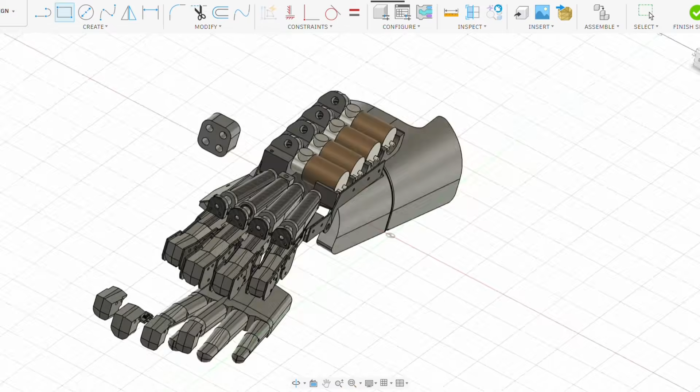And to explain the design that I've come up with that is on my left hand, we're going to jump straight into CAD. And here it is, probably the most complicated single design that I've ever made, just because of the quantity of different parts that are involved. So we're going to start off with the easy end, that being the forearm, which is going to be rotating for some better wrist movement.

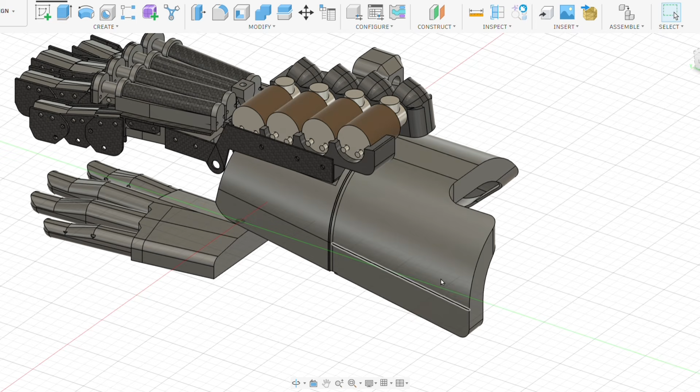This consists of two main casings, the geometry of which is based on what's on the power armour suit already, so I know they'll fit. This casing can be filled with armour and then used to mount onto the carbon fibre exoskeleton. And if we just remove the back plate here, you can see where this will basically slot into the other half of the forearm, which will be held together with a T-slot of carbon fibre for strength, allowing it to rotate around.

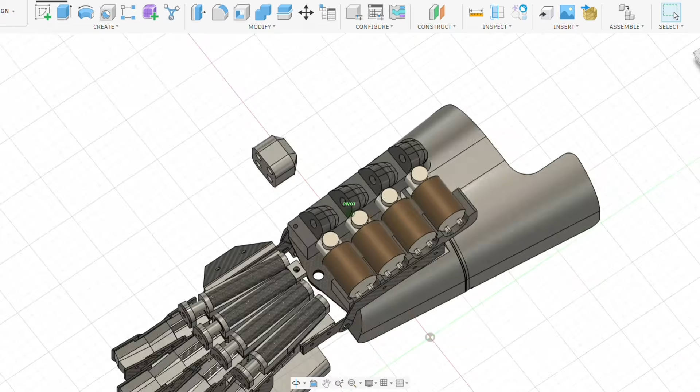And then moving further forward, this whole thing is going to be pneumatic like the rest of the suit is going to start off being, at least. So we've got this air solenoid valve block mounted on the front of the forearm. This consists of 4 simple air solenoids that are screwed into a 3D print that's going to be a high infill. It won't be quite airtight, but it'll be airtight enough for this procedure.

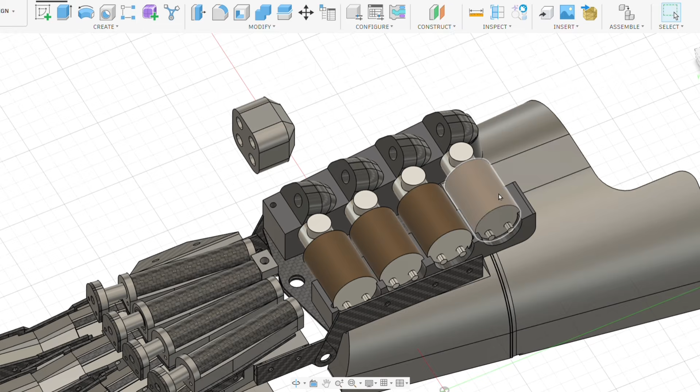There'll then be push-fit connectors mounted into that block for air pipes to go to the hand, as well as push-fit connectors mounted into the solenoid to go into a central block for the air supply. That then brings us further on to the pistons and cylinders that are mounted on top of the palm. These are carbon fibre cylinders mounted onto 3D prints that are used just to hold the cylinders in place.

Then the pistons in question will have an O-ring on one end. They'll be predominantly 3D printed down the middle, but we'll have a bolt that runs down the centre for strength, and then a carbon fibre end plate, which then allows cables to be attached onto the end.

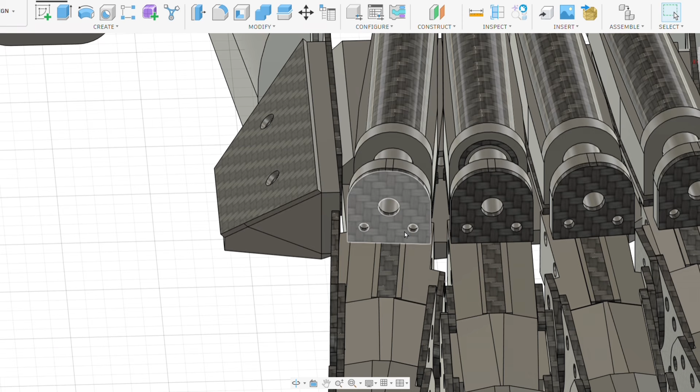I'm using this mix of 3D printed parts and carbon fibre to make sure I've got the strength where I need it from the easy to machine cured pieces of carbon fibre, while having the cheapness and flexibility of using 3D printed parts in the middle of everything, where the geometry is complex and hard to make out of carbon fibre, but also doesn't need strength in those places.

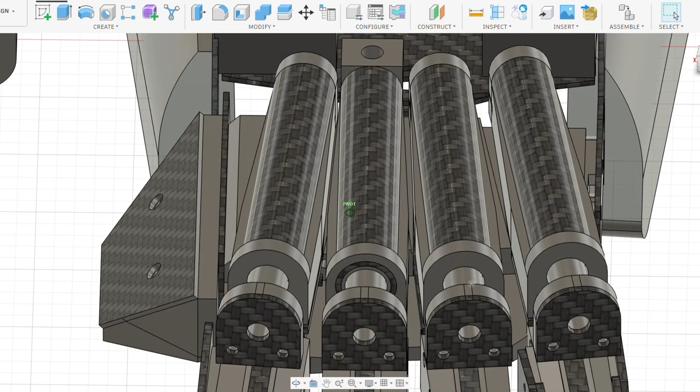Which brings me on to where those cables are running. These cables then run from that carbon fibre plate on the tip of the piston down through the holders of the cylinders, and then around the back of the palm, and then through the holes through the centre of the palm, which hopefully you can just about see here. The cables then come out of these holes and then run down the side of the fingers.

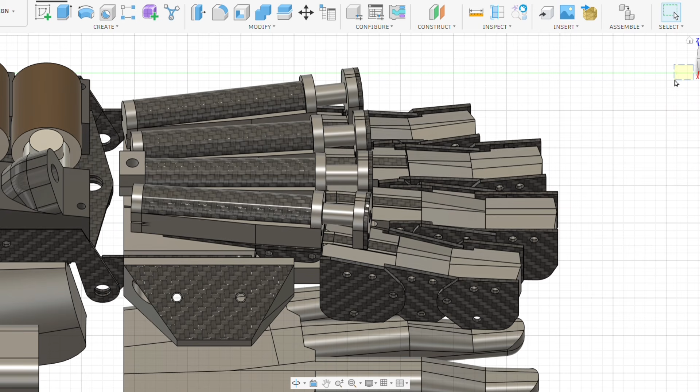They then run through the holes on the carbon fibre on the side of the fingers and then attach to the bolt hole at the tip of the fingers. This means when air pressure is then applied down the cylinder, it then pushes the piston out, pulls the cable down through the hole, and then coils and closes the finger up. And that is how it applies pressure. That is how it assists on that grip strength.

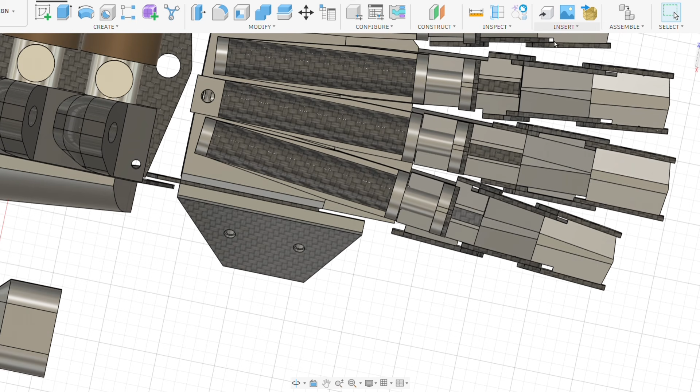And while we are rotated onto this side of the hand, you can see there isn't actually a thumb on this. The reason for that is just that the thumb is really complex in movement, and because I don't know how well this is going to work or how aggressive it's going to be, as well with the fact that I'm tight for space already, I'm going to leave it off for now. I've just got this nice carbon fibre looking cover over the side of it, but I figure as well, really your thumb just kind of locks everything in place. It doesn't provide that much power. So once I've figured this thing out, I can add it on at a later date.

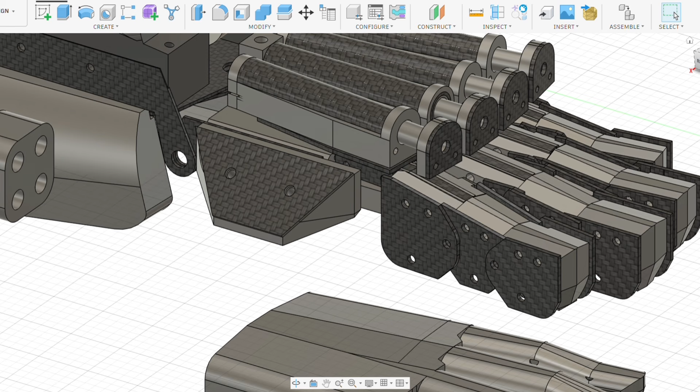And lastly on this overcomplicated CAD design is the most complicated thing, which is the fingers. So the trouble with the fingers, as I've mentioned, is that they need to be really thin. So we've got these thin pieces of carbon fibre running down either side of the 3D print. The carbon fibre pieces will then bolt together at the knuckles to make up the structure of the fingers. However, it does get more complicated than that, because you then have the knuckle around the top of the fist, like your punching knuckle. The problem is you can't have the hinging point in the middle of that knuckle, because that would obviously interfere with the middle of your hand.

So instead, I've had to incorporate a sliding mechanism that rotates over the palm, over the top of the fingers, which if we remove this cylinder holder, you can just about see where the mechanism is. We've got these carbon fibre plates. There's one on top here that you can see, and then there's one going through the central point of the palm with 5mm carbon fibre pieces on each end, which then attach to the hinging mechanism at the front, which you can just about see here, which then attaches to the finger, allowing it all to extend over your hand as you close your fingers round.

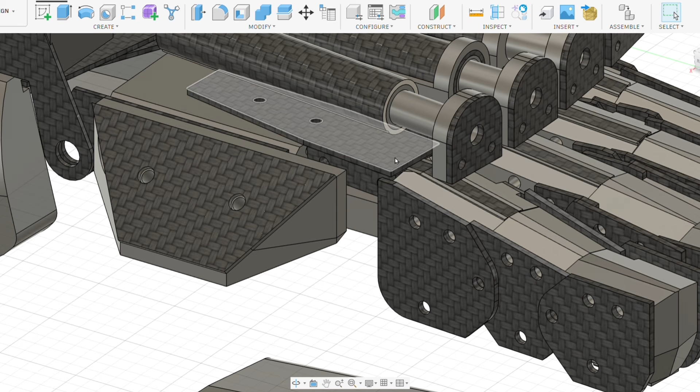I've made this so when it's extended, it all kind of locks against each other. So as the piston pushes the cable out and the cable pulls the fingers round, it won't be able to crush your fingers back into place. The whole thing will basically lock out against itself, allowing it to close the fingers tighter without dragging the fingers back in the slide. I hope that makes sense. I'll try to demonstrate this as best as possible when it's all built up.

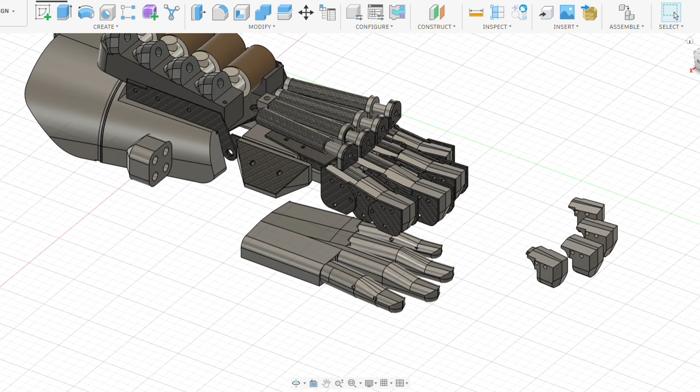And then to make sure I wasn't just completely guessing with finger geometry and everything like that, I did do a very, very simple 3D model of my left hand. I wanted it smooth, didn't want it super detailed, that way I could just push it up inside the 3D prints to create a mould in CAD to make sure that my hand fits it correctly and all of the hinge points are right.

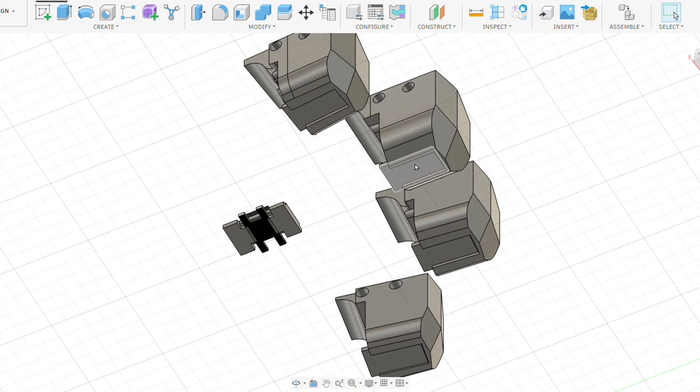This finally brings me on to how I'm actually going to activate the air solenoids that then push the pistons out. For this, I'm just going to have easy, simple electrical buttons in the fingertips. This thing is only going to close, it's not going to open the fingers, that way there's less chance of me breaking my fingers. And the reason why I want these buttons in the fingertips is so they only activate when I'm actively gripping something. So only when I'm pressing down on something do my fingers inside the fingertips then press the switches down. These are just going to be on and off switches, which doesn't bother me because I can also alter the pressure going into the cylinders.

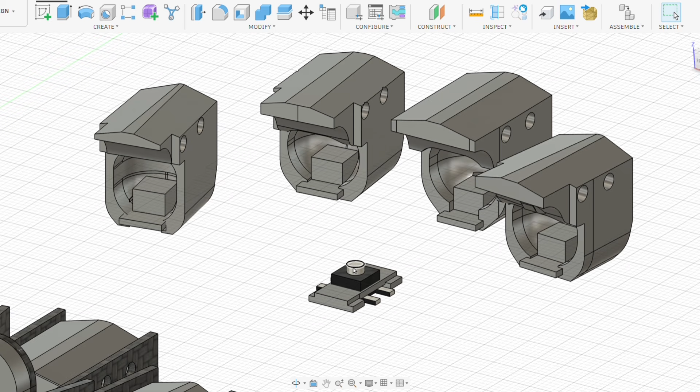This is a Mark 1, so I'm not bothered about variance. And because they'll only activate when I'm clamping down on something, it's not like it matters if it's high or low pressure going into it. These are going to be simple Arduino toggle button switches. You can buy them on these little boards that I will then badly solder to wires and then slot them

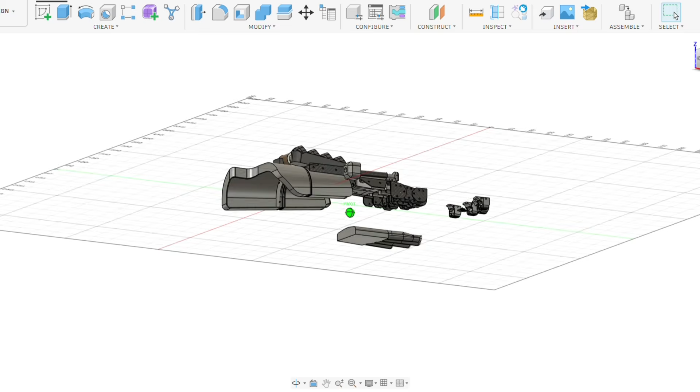into the fingertips. The wiring is then going to be a complete mess because I don't know where to run it. I don't know how much slack I need on the wires, so that's just going to kind of sit underneath the palm. But they'll do for the Mark 1. These wires can then run to the air solenoids, etc. Oh, and I've just realised I missed the wrist mechanism.

So you've got the plates of carbon fibre that go on the side of the solenoid block, carbon fibre pieces that then bolt along the side of the palm. These are then hinged up and down for the up and down movement. You then have two plates of carbon fibre with that hinging point in the middle that allows your hand to rotate a bit left and right.

I did decide to have the air solenoid block attached directly to the hand on that one. That's just to kind of limit movement that's going to have to exist between the air pipes and everything. I thought it would be less likely to break if as much is attached to the hand as possible. That whole system I'm hoping is going to work really well because that is a part that regardless I would like to move on to the rest of the power armour whether I've got a gauntlet or not.

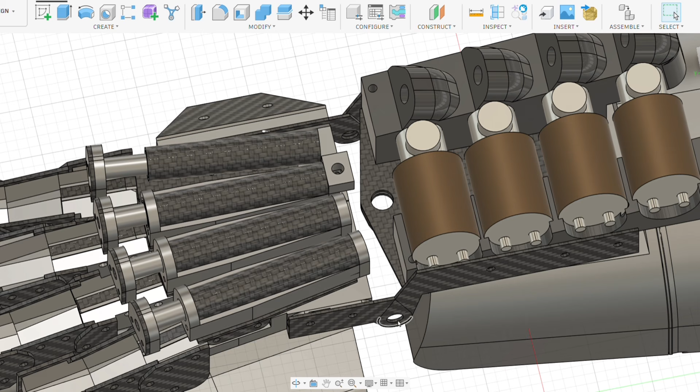And I think, ladies and gentlemen, I'm sure mainly gentlemen, we have finally done this CAD design and it's time to move on to the actual build. If you're still with us, thank you very much. Please keep on watching to make up for the ones that couldn't make it past my rambling of this design. Anyway, to the CNC machine.

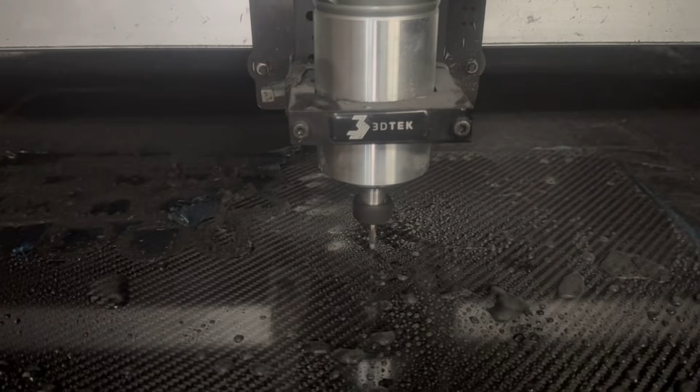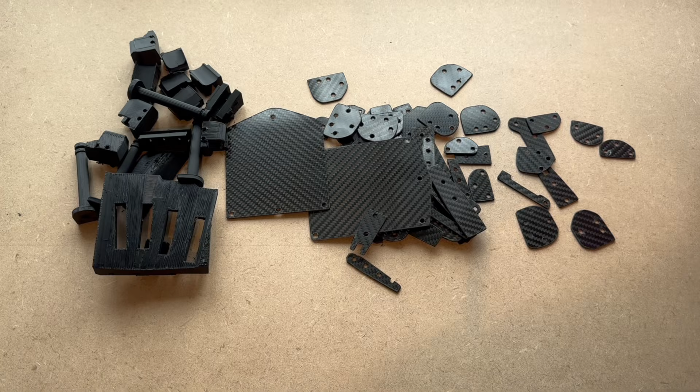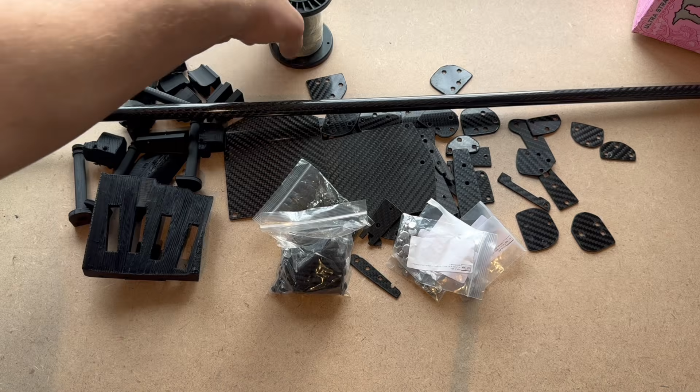And here we have all the 3D printed parts, and then we have the CNC cut carbon fibre parts, as well as some carbon fibre tubes for the cylinders, a load of bolts, M4 in particular, as well as some sleeve nuts, also some of these threaded rivets, and some 1mm steel cable, along with the two main pieces of the forearm, the 3D print casings for the armour.

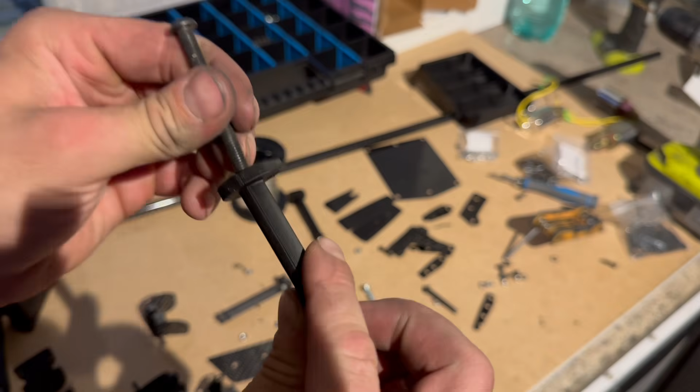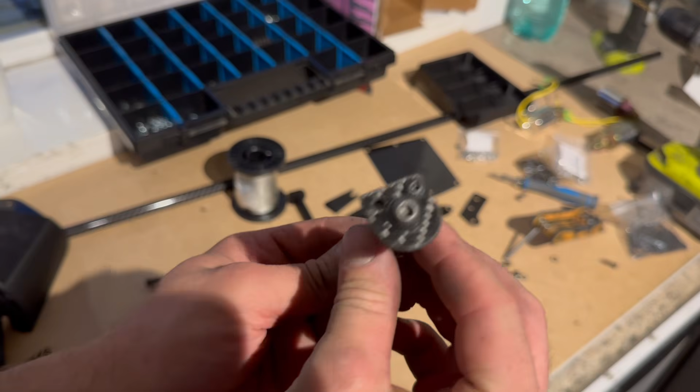I thought I would start with the pistons. You can see how long the bolt is and how it runs through the centre of that 3D print and how the 3D print is not actually the structure of it. It just helps to hold the O-ring and add to a mounting point for that carbon fibre that is again held in place with the bolt. It's almost like using rebar in concrete in a way.

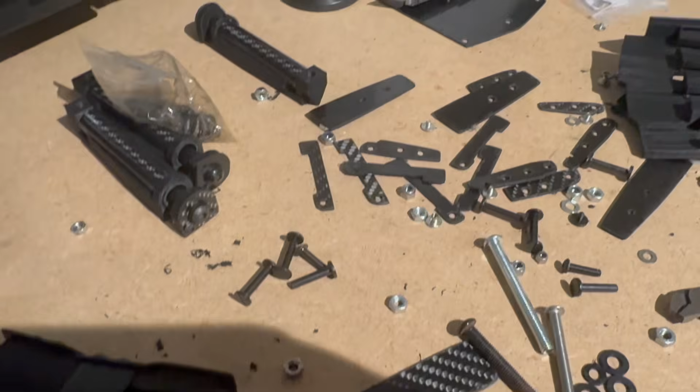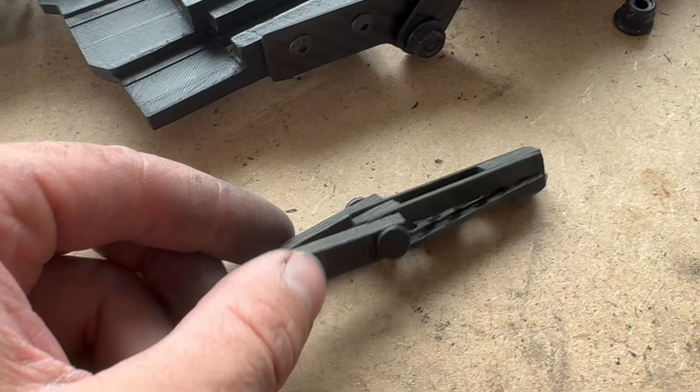Then there's something I couldn't quite show in CAD, and it's these nut inserts in the bottom of the cylinder holders. These allow each of the fingers to be bolted together through that carbon fibre and easily secured into the palm, crucially without interacting with the cylinder itself. And then this is part of that carbon fibre mechanism that rotates over the top of the palm. You can see how it kind of fits in there. You can see how it slots into the palm there.

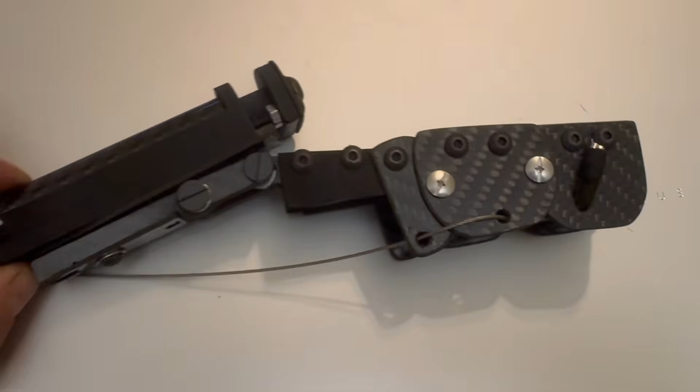But here you can see the finger built up with the piston attached. You can kind of get more of a drift of how it all slots in and fits together. Then we have the valve block all built up with the push fits and solenoids all screwed in neatly. But then I have to admit the build quality took quite a dive when I had to solder these little buttons on to the wires. But they are the right size and they do slot into the fingertips nicely.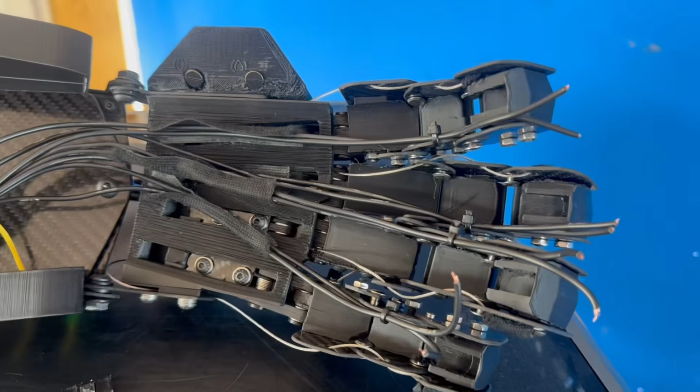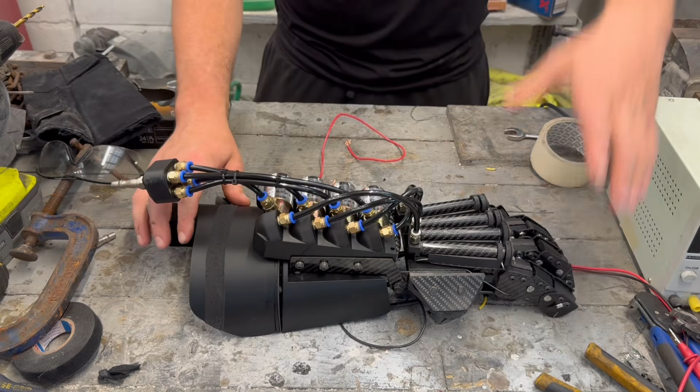Of which here you can see how badly the wiring's going, but you can see how I couldn't really work out where to route it and how much slack I needed, and that this was just the easiest way at this point. So I've now got the hand all built up with what should be the final valve block and final fittings for it all. Still got to do a little bit of soldering on a couple of switches, but I thought I'll show you as it is. So we've got, starting off with the forearm, we've got the swiveling forearm.

That allows the rotation on the wrist. I do need to lubricate it up a little bit. And then we've got the air solenoids here, all with air pipes fitted in. Push fit connectors, all onto each one, built into the 3D printed block. That also has a 3D printed block for the main air supply.

Then we've got those carbon fibre cylinders running up top. These do need to be heavily glued into the 3D prints. When they are, it's fine. If not, they do tend to pop out.

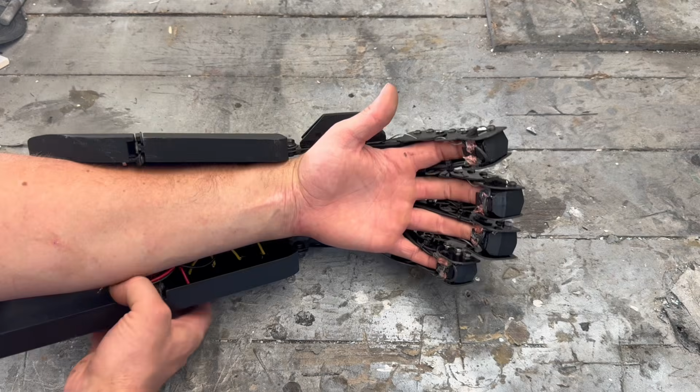And then if we flip it upside down, you can see as I slide my hand in, it does actually fit pretty well, even with just the fingertips and no straps. It does naturally want to hang onto your hand correctly. You can see I can move the fingers, and if we rotate over to the side.

So if we take a look at the finger, you can see when I pull my finger in, it pulls all that slider out. And then when I straighten the finger up, it automatically starts to push it back in. Pull it out and push it back in. So it's actually worked pretty smooth. It's a little bit stiff, could do with some lubrication, but it does work.

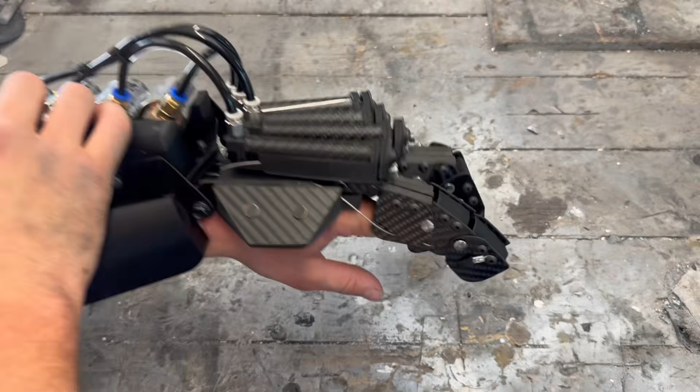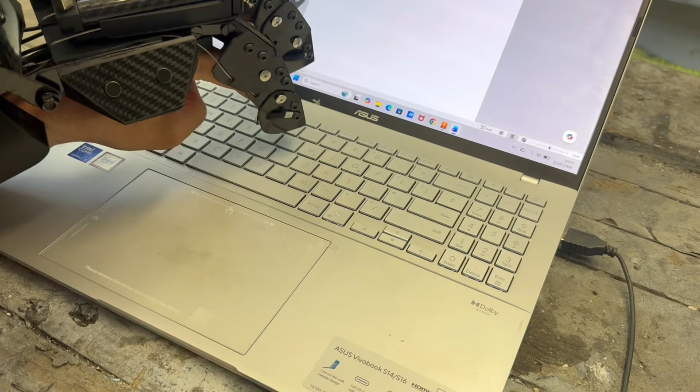Before applying power, I thought I may as well do a dexterity check now and see if I can type anything. The plus point with those carbon fibre pieces being longer than the 3D prints is you can use them to contact smaller things like keys on a keyboard. Once you get the hang of it, it's not actually that bad. I'm not going to say it's quick, of course, but it is possible.

And then you can use basic car controls, although, to be honest, nothing too fiddly. And I obviously wouldn't drive while using it. We'll now give this a little test and see how strong it is, how powerful it is, and whether it tries to break all my fingers.

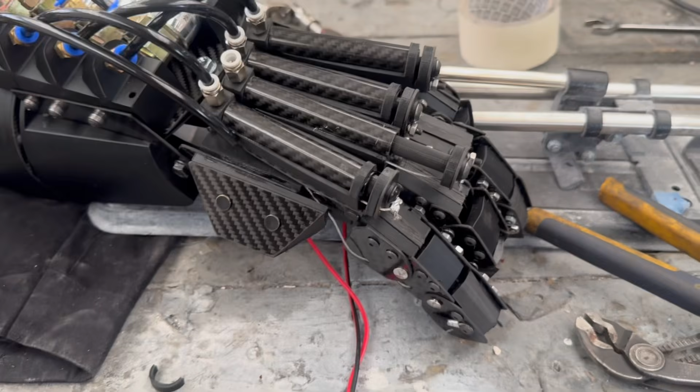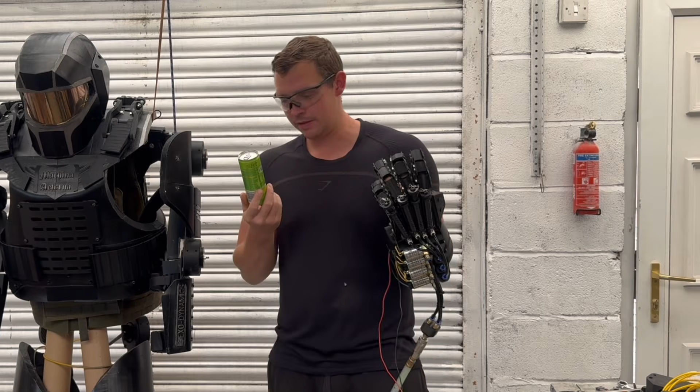Firstly though, I thought I'd just hotwire the solenoids and see what happened when I activated the air pistons, because I had no idea how strong it was actually going to be. But structurally it appeared to be pretty good, so I moved straight on. Testing grip strength with a Boost can. Energy drink successfully wasted.

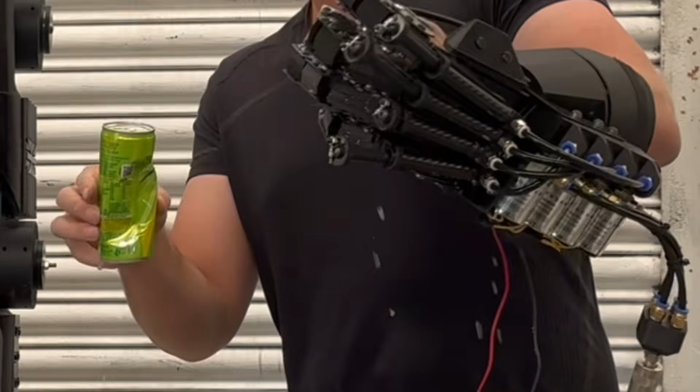But while watching this video back, I did realise I only properly activated 2 fingers and the third at the last second, which does actually make sense with where it split the can, but I decided to have another go and try to activate all 4 fingers at once. And round 2 with the Boost can. Oh, I see the issue. But I had a part failure, which I predicted would happen eventually, but I thought it'd take a lot longer than this. But I'll explain.

So after those experiments, what's this actually like to wear? Well, it doesn't feel as sketchy as I thought it would do. It doesn't feel like it's going to start breaking your fingers anytime soon. The activation only working when you actually start gripping hard on something works well for that. It means it's not trying to activate randomly. You can feel it increasing your grip strength. You can feel it doing an extra clamp down, trying to close up.

The only problem I've got at the minute is the 3D printed parts, which, if anything, I kind of designed so they'd fail before something else did, have started to quickly wear down where the cables are running through. What is happening, which you can see here, is the cable, which is holding up nicely attached onto these little clamps and onto the bolts and onto the fingers, is starting to just saw through the PLA, saw through the 3D print, like you can see down here. It's also sawing through one of the piston holders on the other side that runs through here.

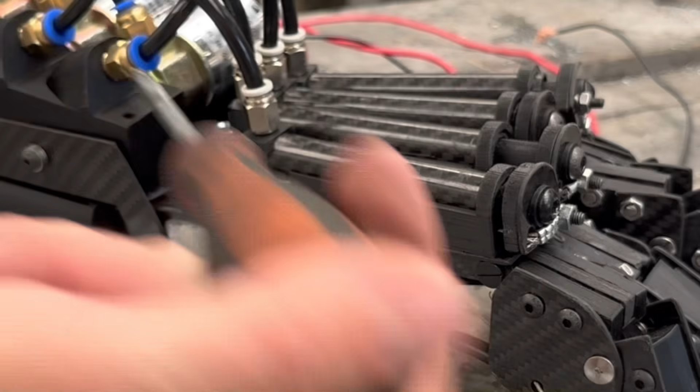So for me to experiment with this in the future, I'll have to insert some carbon rods or steel rods down these. They'll have to be very small, but it is doable. This, as I've mentioned, is what I thought would happen. It's just I thought I'd get a few dozen goes out of this before it started to eat into that plastic. But actually, I've probably had a few goes out of it unrecorded to see what happens, then done a couple of recordings, and it's already chewed its way through it. Does make me think though it has more power to give with how quickly it's chewed through that plastic in probably half a dozen goes.

Another improvement I think I can make, to try and close the fingers up a bit more: instead of having 1.5mm thick carbon fibre on each side of the pinky finger and the index finger, it'd be better to have 3mm down one side, basically strengthen it up on one side and have it thinner in the middle. That'd allow the two end fingers to be closer to each other. It might even be worth doing that on one of the two middle fingers, just to try and bring them in a little bit closer.

However, those two fingers, if anything, felt really good when you're fitting in. The gap's not a problem. The pinky finger, though, does feel a little bit further away, a little bit further to the left. So if I could just move that in 3mm, that would make a big change.

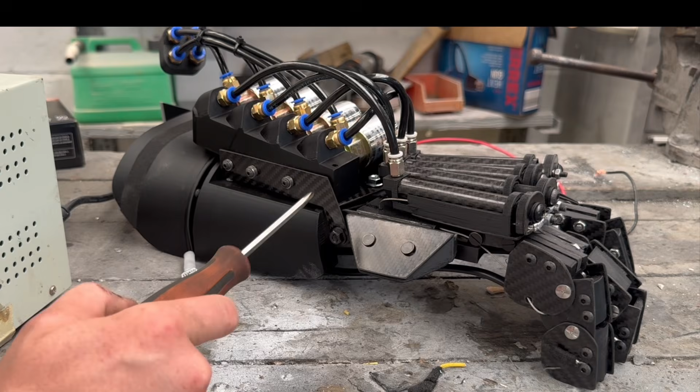As for what to do about the thumb, if I come back to this in the future, I'd probably make a thumb like a finger, but actually just have it unpowered. I don't think it's worth the problems of trying to make it powered with all the directions your thumb moves, but it would be good to have your thumb in something, as it's the only part that isn't. And it'd actually help it all fit better and hang onto your hand better with less elastic or less tape.

Overall though, it fits really well, and I certainly want to move some of the design choices onto the rest of the suit regardless of the powered hand. I want the palm and this whole rotating mechanism along with the forearm on the rest of the suit, as it just makes it fit the hand and arm so much better and just kind of sits well on your forearm.

So going back to the opening of this video, do I think this little experiment was a success? The experiment, yes. However, do I think that a powered gauntlet, a power fist, could be actually usable on a real suit of power armour? The answer is probably still no. At the end of the day, I think it's still a bit too bulky to be used, and I don't know how I can make it much thinner when it's got to fit round an actual human hand. However, I think it was certainly an interesting build to do, even though it took, frankly, way too long, and there's a lot that I can still take forward on the suit of power armour, like the forearm and all of this wrist mechanism.

Speaking of which, in the next video, we'll be doing some upgrades to the suit, hopefully getting a power system. I'm not sure yet on whether to actually just do a speed run of building an entire new suit, as I've modified it so many times now. I could pretty much build a new one with all new parts and actually see how long it takes to make this. Or whether to buy a power system first, fit it to this and then transfer it to whatever I build in the future.